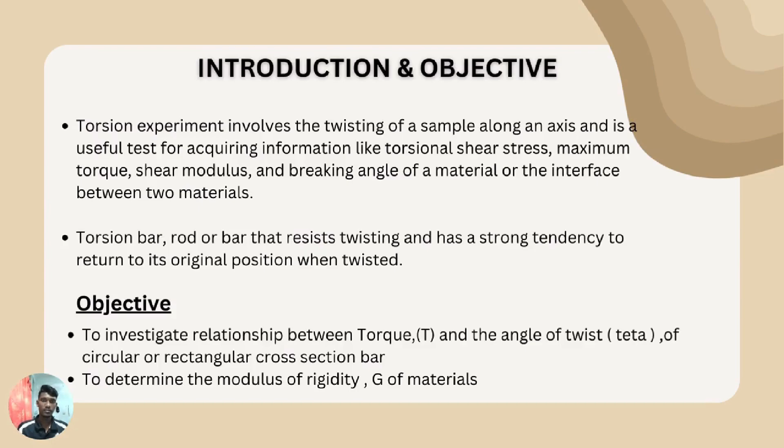Next is the theory of the experiment. Basically, a cylindrical rod that is attached at one end and has the other end twisted or torqued is called a torsion bar. The rotational angle, referred to as the angle of twist, can be calculated when the bar twists. Shear stress is the term for the stress that forms as a result of the twisting.

The formula for torque is T equal to F r sin theta, whereas F equal to perpendicular force applied, R equal to the radius of the rod, and theta is the angle between the force and the object.

We can get the shear stress equation from L multiplied by gamma equal to P theta, and we can get gamma equal to P theta divided by L. Whereas gamma is equal to the shearing strain, P is equal to length from center to any point in the circular shaft, theta is the angle of twist, and L is the length of shaft.

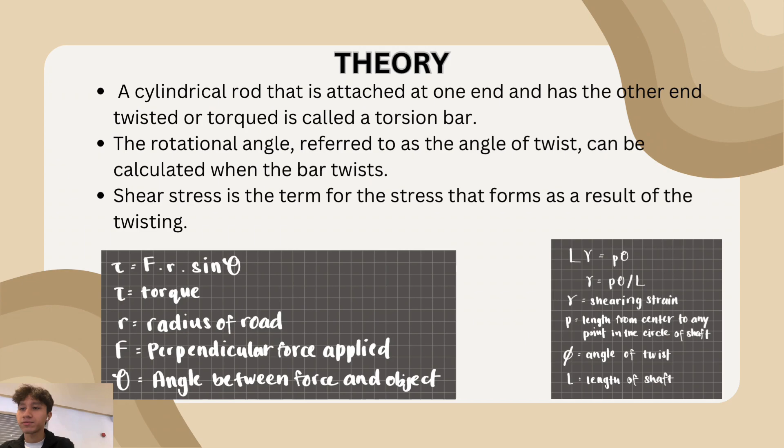The shaft or rod surface experiences the most shearing strain, where P is equal to C. We can get gamma max equal to C theta divided by L, where gamma max is the maximum shearing strain, C is the radius of the shaft, theta is the angle of twist, and L is the length of the shaft or rod.

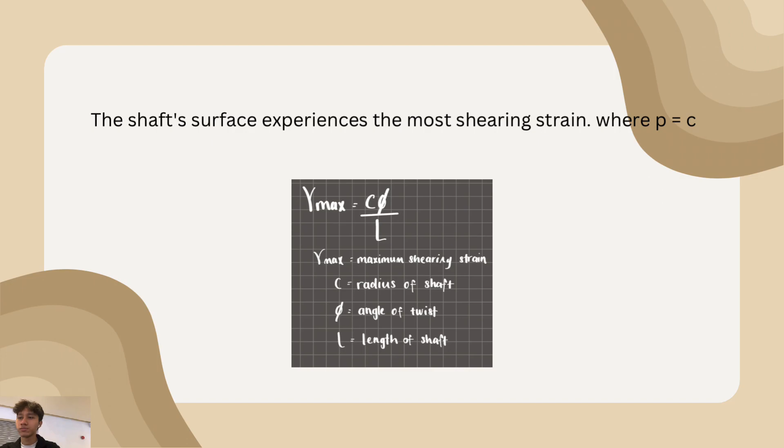Since the stress generated does not exceed limits anywhere inside the shaft, Hooke's law may be used to link shearing strain and shear stress in the elastic range, where the equation relationship is gamma max equal to tau max divided by G, which is the modulus of rigidity, equal to Tc divided by Jg, whereas J is equal to the polar moment of inertia. Hence, the maximum shear stress can be found by equating both right-hand sides of the equation.

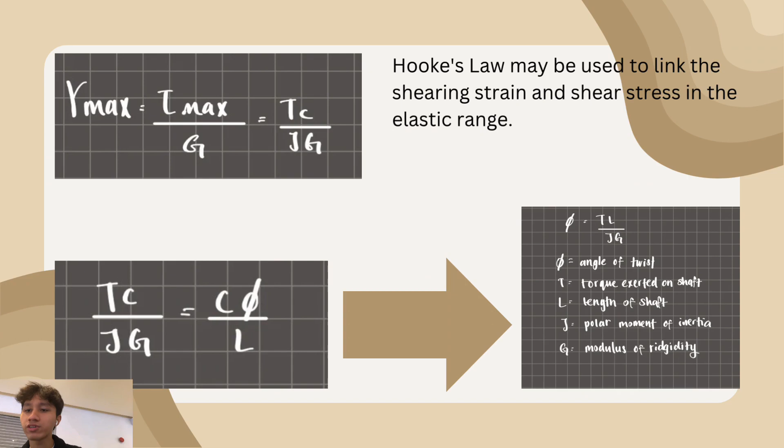So we can get theta is equal to TL divided by Jg, whereas theta is equal to the angle of twist, T is equal to torque exerted on the shaft, L is the length of the shaft, J is equal to the polar moment of inertia, and G is equal to the modulus of rigidity.

As for the experimental setup, we will need a torsion bar testing machine, steel rod, aluminum rod, nylon rod, loads of 1 Newton and 5 Newton, a spanner, vernier caliper, and a ruler. The material should be arranged as shown in the picture here.

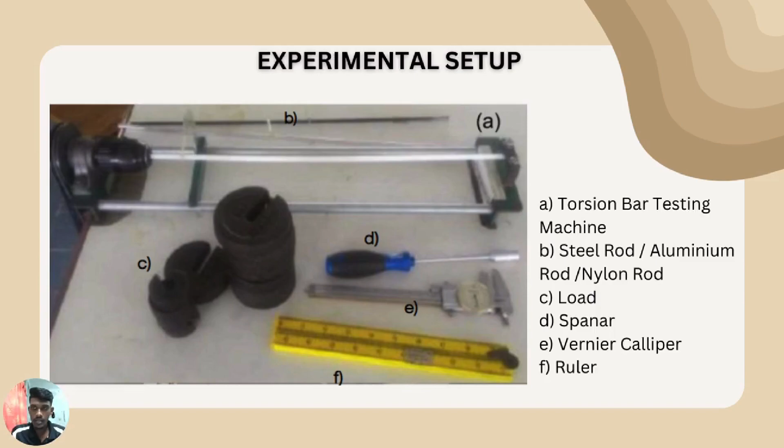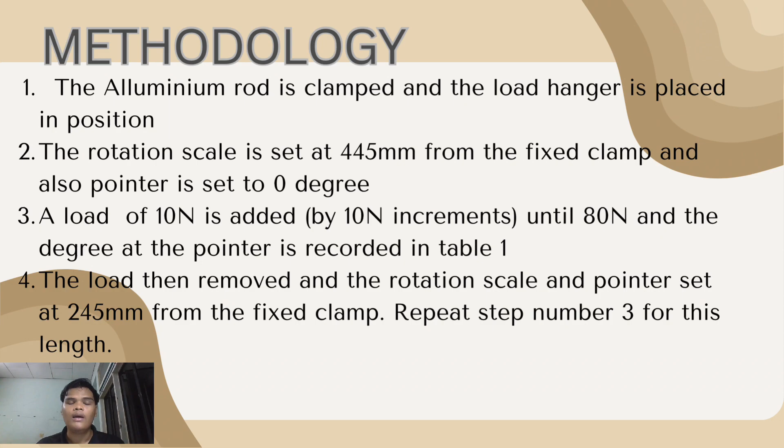The first procedure for this experiment: the aluminium rod is clamped and the load hanger is placed in position. Then, the rotation scale is set at 445 mm from the fixed clamp, and the pointer is also set to 0 degrees. A load of 10 Newton is added in 10 Newton increments each until 80 Newton, and the degree at the pointer is recorded in table 1.

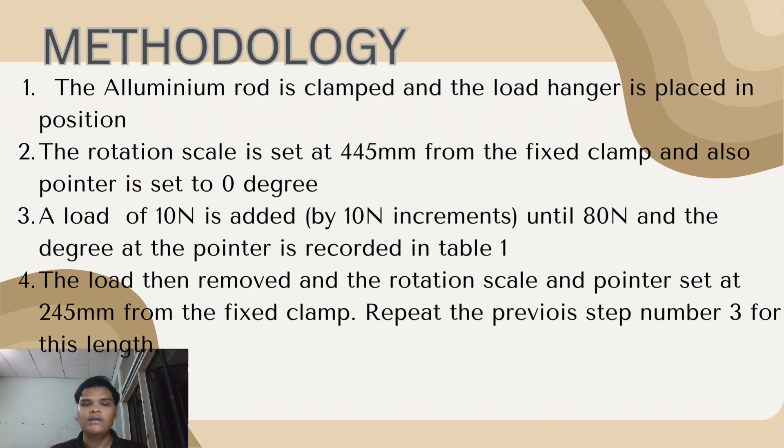The load is then removed and the rotation scale and pointer is set at 245 mm from the fixed clamp. Repeat the previous step for this length. After recording for the aluminium rod, we change the specimen to the steel rod and repeat the same procedure, with the result recorded in table 2.

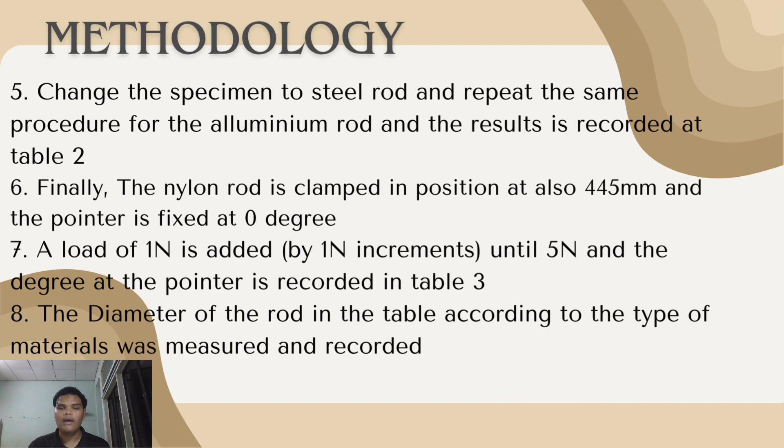Finally, the nylon rod is clamped in position at 445 mm and the pointer is fixed at 0 degrees. A load of 1 Newton is added in 1 Newton increments until 5 Newton, and the degree at the pointer is recorded in table 3. The diameter of the rod in the table, according to the type of material, was measured and recorded.

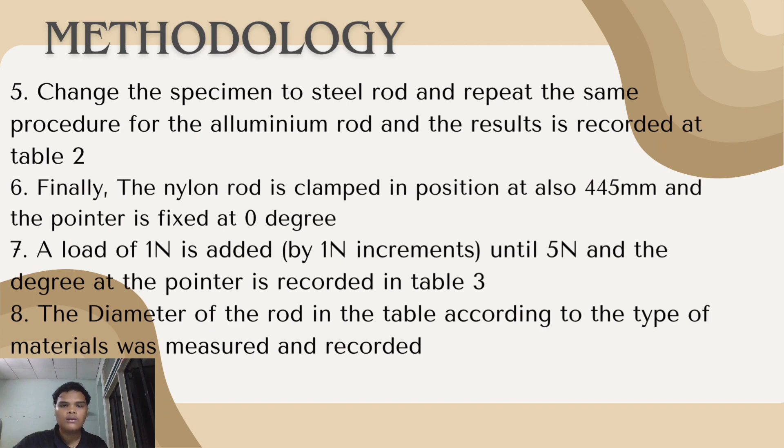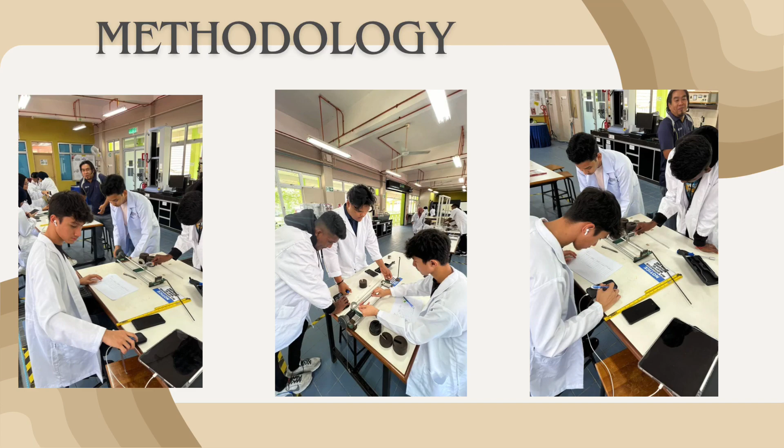There are 5 things we need to take into account in the safety procedure. The first one is, to avoid parallax error, keep your eyes perpendicular to the scale when taking the reading measurement. The second one is, ensure the rod used is not deformed. If it is deformed, change it to a new one.

To increase the accuracy, take the measurement reading when the load is not swinging. The second last one is, to avoid load fall, make sure the hole is tightened before starting the experiment. And the last one is, ensure the student wears proper PPE when conducting the experiment, which is the lab coat.

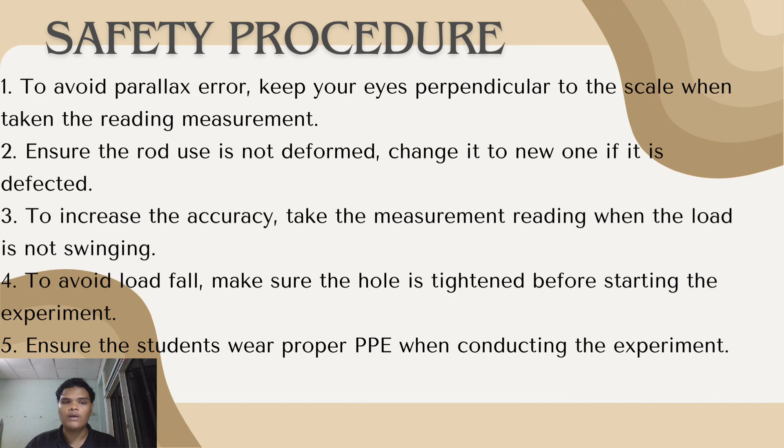Next is the calculation for the experiment. We are going to calculate the torque for each material used, which is the aluminum alloy rod, steel rod, and nylon rod, by using the formula T equals Fr sin theta, where R equals the radius of the rod, F equals the magnitude of force applied perpendicular to the rod, and theta equals the angle between radius and force.

The first material used is the aluminum alloy rod. The torque for the rod length 445 mm is 1.13 Nm for the 10 Newton load and 5.541 Nm for the 20 Newton load. For the rod length 245 mm, the torque produced for the 10 Newton load is 1.13 Nm, and for the 20 Newton load, we get 4.450 Nm.

Next is the steel rod. For the rod length 445 mm, the load for 10 Newton gives torque of 0.432 Nm, and for the load 20 Newton, the torque equals 2.453 Nm. For the steel rod length 245 mm, the load 10 Newton gives torque 0.432 Nm, and the load 20 Newton gives 1.728 Nm.

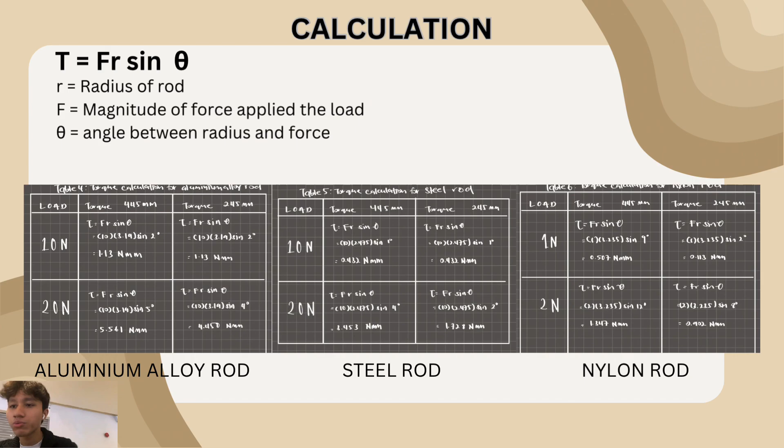For the nylon rod length 445 mm, using 1 Newton load, we get 0.507 Nm, and for the 2 Newton load, we get 1.347 Nm. For the nylon rod length 245 mm, the 1 Newton load gives 0.113 Nm, and the 2 Newton load gives 0.902 Nm.

Next, we are going to calculate the modulus of rigidity. First, we find the polar moment of inertia, where J equals pi c to the power of 4 divided by 2, and c equals the radius of the rod. Then we can get the modulus of rigidity, where G equals L divided by mJ, where L is the length of rod, J is the polar moment of inertia, and m is the value of slope from the graph.

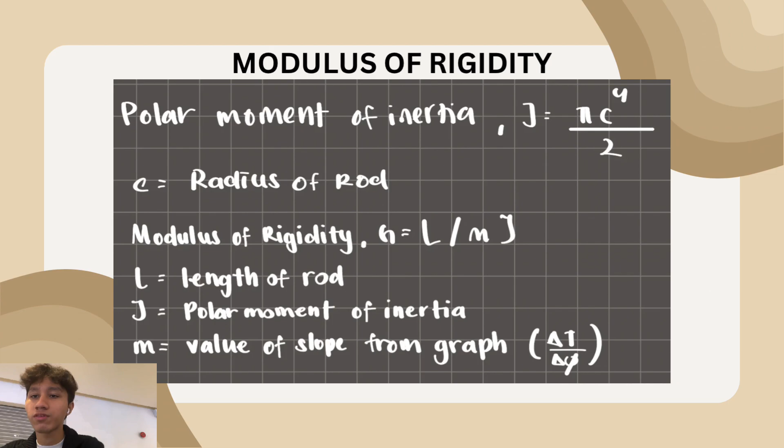These are the modulus of rigidity calculations for the aluminum alloy rod. For the length 445 mm, the polar moment of inertia is 152.72, and the gradient of the slope from the graph is 0.20743. Calculating with the modulus of rigidity formula, we get 804.75 Newton per millimeter squared. For the length 245 mm, we get 477.43 Newton per millimeter squared. The average modulus of rigidity for the aluminum alloy rod is 0.64 GPa.

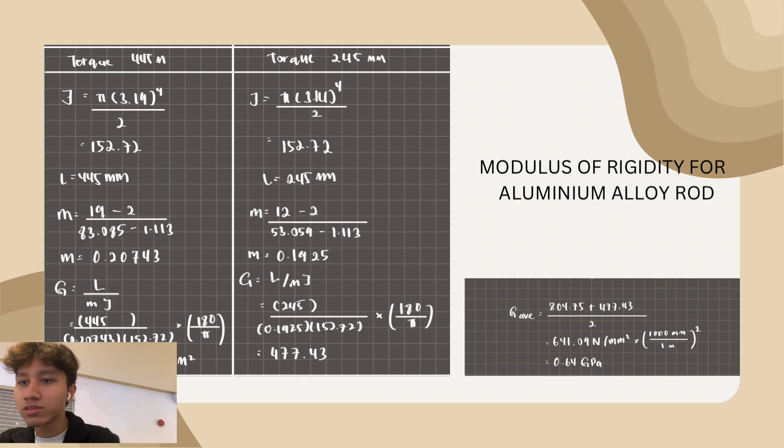Next is the modulus of rigidity for the steel rod. Same as before, we find J, the polar moment of inertia, which is 58.9491, with length 445 millimeter, and the gradient from the graph is 0.277, giving a modulus of rigidity equal to 1561.24 Newton per millimeter squared. For the rod length 245 millimeter, we get the modulus of rigidity 898.14 Newton per millimeter squared. The average modulus of rigidity for the steel rod is 1.23 GPa.

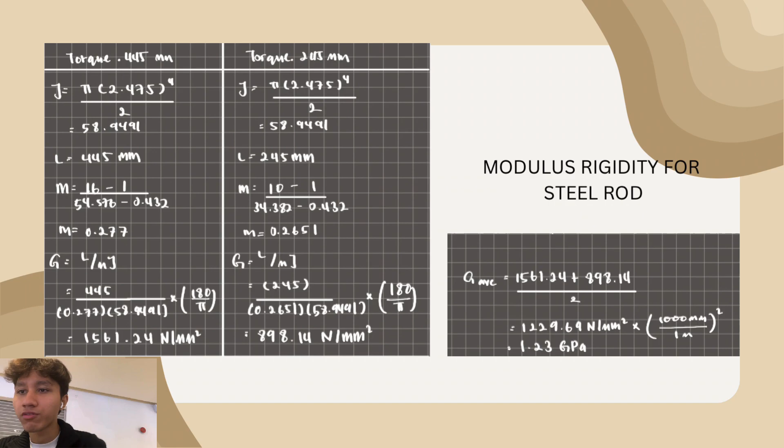Lastly, for the modulus of rigidity for nylon rod, for the rod length 445 mm, we find the J polar moment of inertia, which is 172.0574, and the length is equal to 445 mm. Next, we find the gradient M, we get 2.7628, and the modulus of rigidity is equal to 53.61 Newton per millimeter squared. For the rod length 245 mm, we get the modulus of rigidity equal to 25.14 Newton per millimeter squared. Finally, the average modulus of rigidity of the nylon rod is equal to 0.0394 GPa.

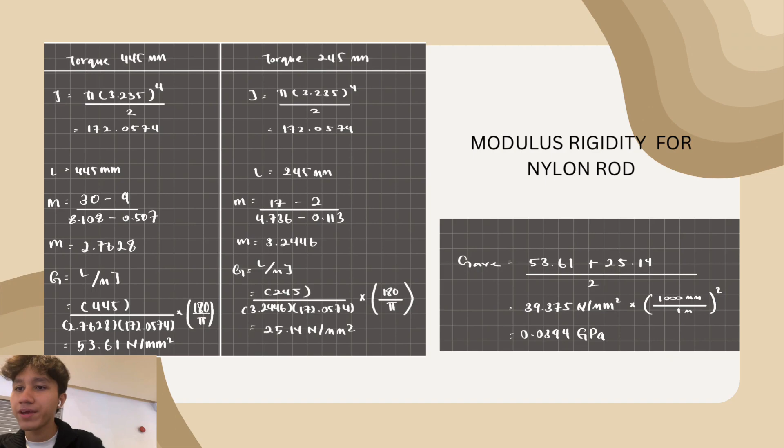We can see that the steel rod has a smaller angle of twist, followed by the aluminium rod, and lastly the nylon rod.

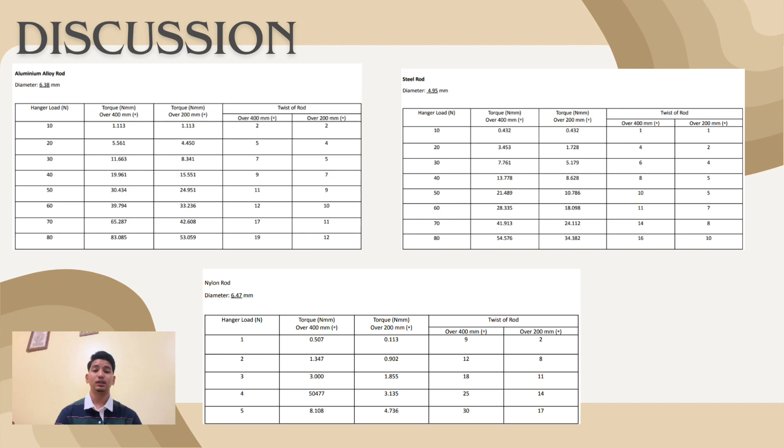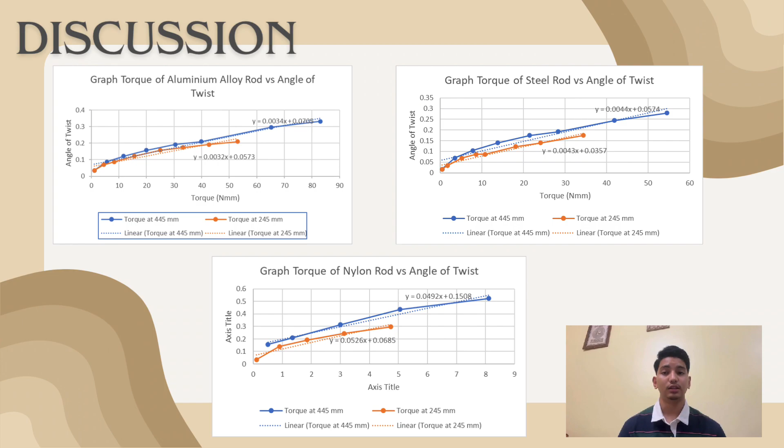Next, I will discuss the graph and table on the next slide. The graph of angle of twist against torque of the aluminium rod, steel rod, and nylon rod are constructed and shown in Figure 1, Figure 2, and Figure 3.

Based on the graph results obtained in this experiment, the angle of twist is directly proportional to the torque applied to the material. It is also observed that every graph has a linear line where the torque increases and the angle of twist steadily increases. Thus, the linear graph obtained indicates that the materials exhibit purely elastic behavior.

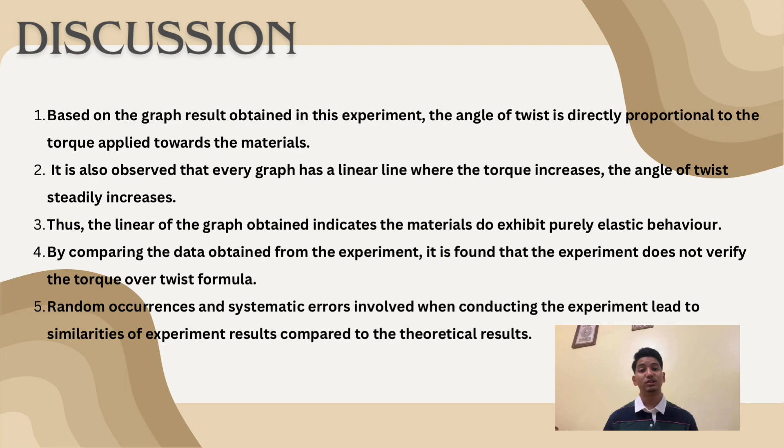By comparing the data obtained from the experiment, it is found that the experiment does not verify the torque over twist formula. Random occurrences and systematic errors involved when conducting an experiment can lead to differences between the experimental results and the theoretical results.

From the three graphs plotted, as shown in Figure 1, Figure 2, and Figure 3, the torque is directly proportional to the angle of twist; the angle of twist increases along with the torque. The length of the rod or other material will have an impact on the graph's slope. As we can see in each graph or for each specimen, the slope becomes steeper as the length is reduced. The graphs also demonstrated how different materials behave in a purely elastic manner, and how their properties affect the angle of twisting.

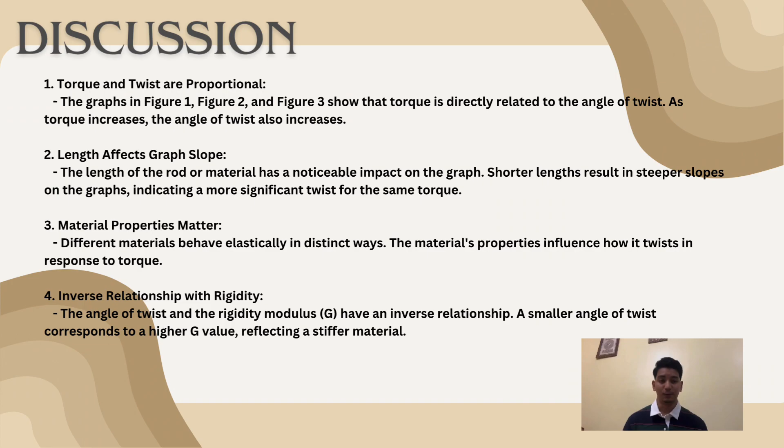Next, on to the comparison between the three different materials. First, the choice of material is a critical factor in comparing aluminium, steel, and nylon bars, each with distinct properties. Aluminium is lightweight and corrosion resistant, steel offers high strength and stiffness, and nylon is a non-metallic material known for wear resistance. Second, when assessing their torque versus twist behavior, it is evident that aluminium and steel bars exhibit a linear relationship due to their stiffness, while nylon's non-metallic nature may lead to a more nonlinear response to torque.

Third, the length of the rotation scale and pointer on each bar plays a role in precision measurement. The longer the scale, the more accurate the tracking of the twist angle during experimentation. Additionally, the torque range within which each material operates effectively varies, with steel being capable of withstanding higher torques compared to aluminium and nylon, making the selection of the appropriate material crucial for specific application experiments.

By comparing these factors, you can make an informed decision about which material and length of bar is best suited for your specific application or experiment. Each material and length will have its advantages and limitations depending on the requirements of the task.

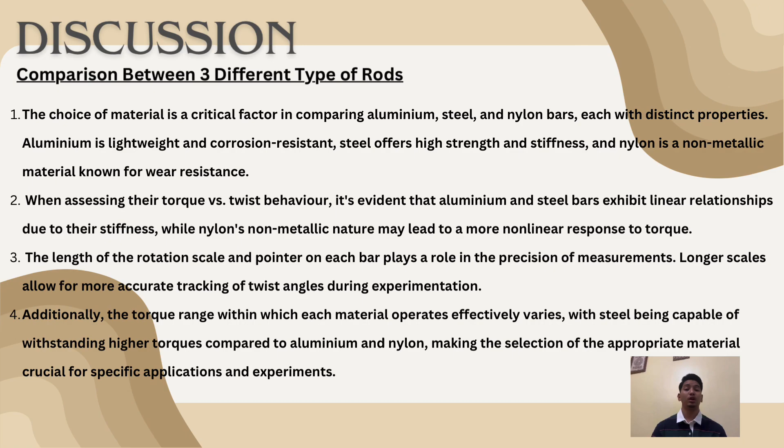From the experimental findings and results, it can be concluded that the relation between the modulus of rigidity of respective materials is depending on the type of materials, such as size of atom, type of bond, and characteristic of each material. The experimental results act as the main objective of the experiment, where observations were done on different materials to check torsion.

For the shape relationship, circular shape is used compared to square rod, as it is easier for the rod to twist smoothly. The polar inertial moment is used to calculate the torsion of the inertial moment on a cylindrical object on a plane perpendicular to the object's central axis.

It can be concluded that the polar inertial moment increases proportionally with the modulus of rigidity. It is reasonable to conclude that each of the three types of bar indicate a different number of twisted rods, as shown by the rotation scale based on the tabulated data gathered during the experiment. It is clear from data tables 1, 2, and 3 that there are various numbers of twisted rods when compared to one another. The tensile properties of each individual substance help explain this.

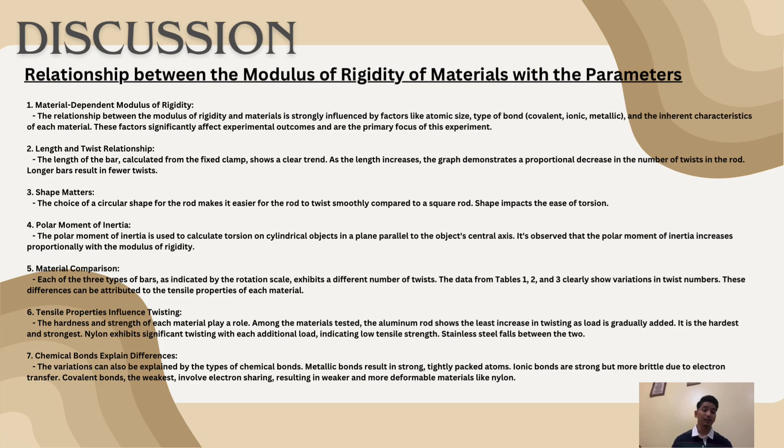For the closing summary of the discussion, two lengths, 245 mm and 445 mm, were used in this experiment to compare the distance between the indicators and the fixed clamp. The overall conclusion that can be drawn from the experiment is that the number of rod twists decreases almost in half as the distance doubles.

From 245 mm to 445 mm, we can therefore draw the conclusion that the number of rod twists decreases proportionally as the distance between the pointer and the fixed clamp increases.

We can conclude that steel is the strongest material available and can withstand higher shear stress than the other two materials, thanks to its high rigidity modulus and applied torque at failure values. Among the three materials, aluminum alloy came in second place because it can withstand more applied shear torque than nylon, but not as much torque as steel.

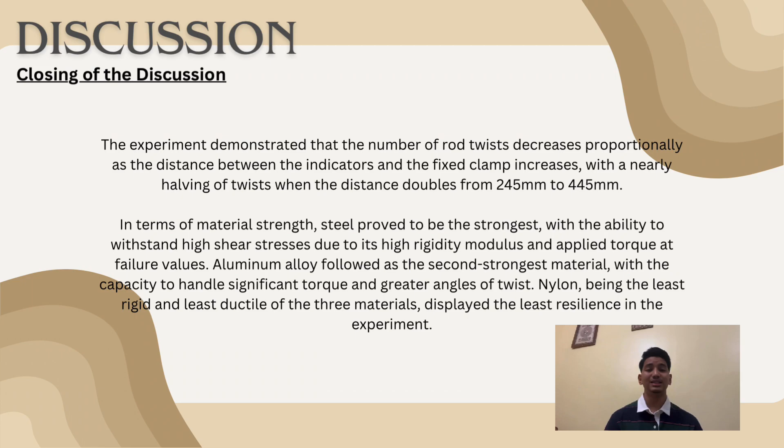Due to a material quality known as ductility, it can withstand a greater angle of twist. The least rigid nylon rod demonstrates nylon's least ductile nature.

Lastly, to conclude this experiment, we needed to investigate the relationship between torque and the angle of twist theta of a circular or rectangular cross-section bar, and to determine the modulus of rigidity. All these have been determined throughout the experiment. We also found that the torque is directly proportional to the angle of twist of a circular cross-section specimen.